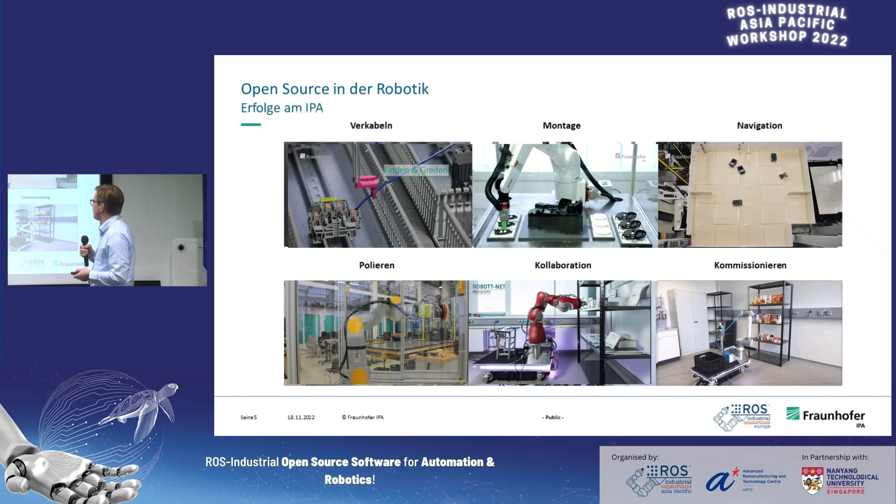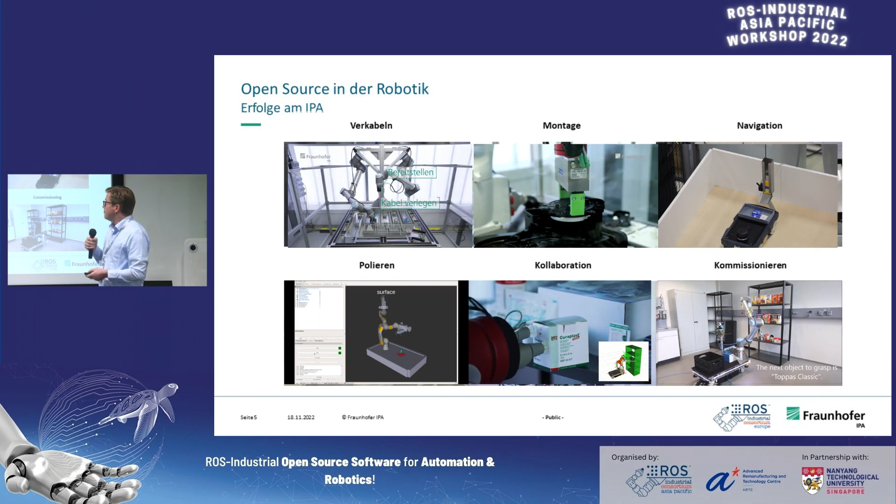All these applications that you see here, hope they are running, are implemented based on ROS, and some of them are already in industry. For example, navigation went into a spin-off. Cabling has been developed with a big cabling company from Germany as well. The assembly guys are also planning to spin off at some point.

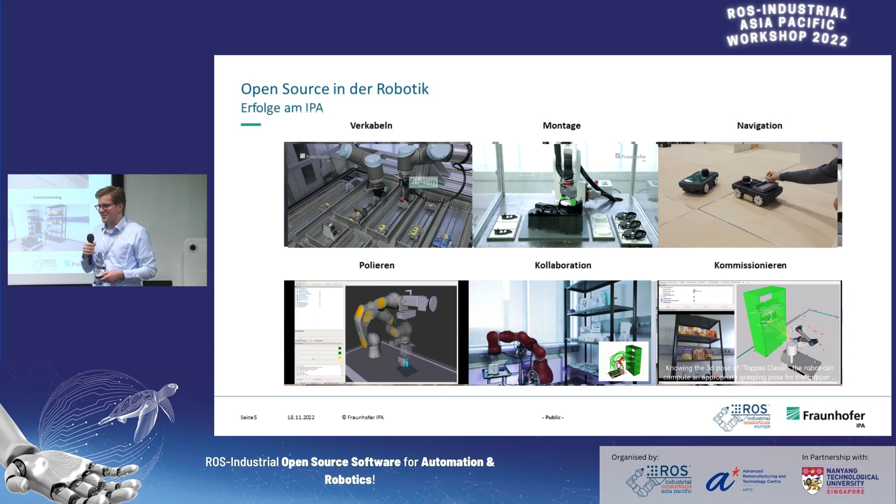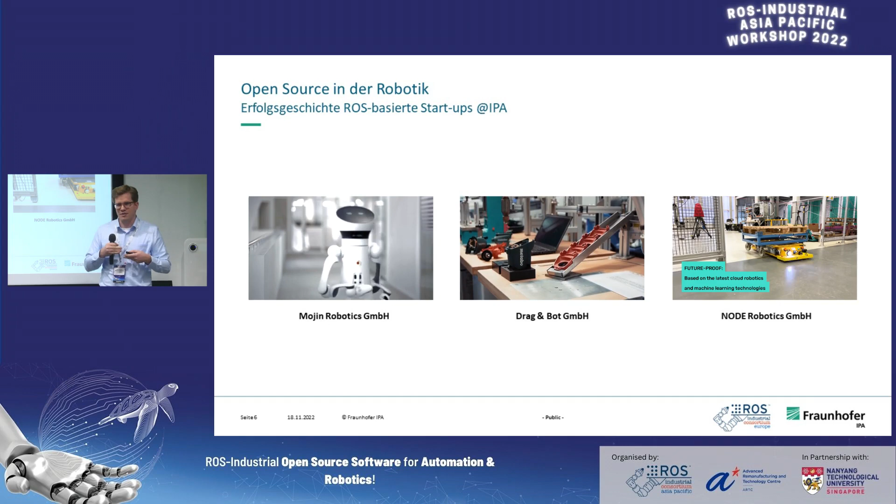A lot of things going on here, a lot of things also in cooperation with our partners at Southwest Research Institute, about publishing for example. We've also been very successful with ROS and bringing ROS into industry. For example, our department of roughly 70 researchers, in the last 5 years had 3 spin-offs, which is basically a record in the Fraunhofer organization.

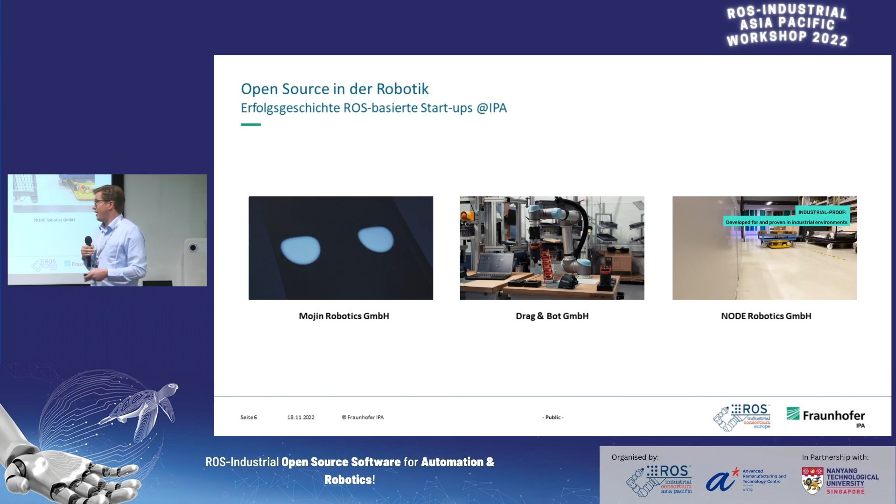And all of these are actually based on ROS. You see Mojin Robotics, which hopefully is running as well—the last one is not running, sorry. You see Mojin Robotics, which is the spin-off with Care-O-bot.

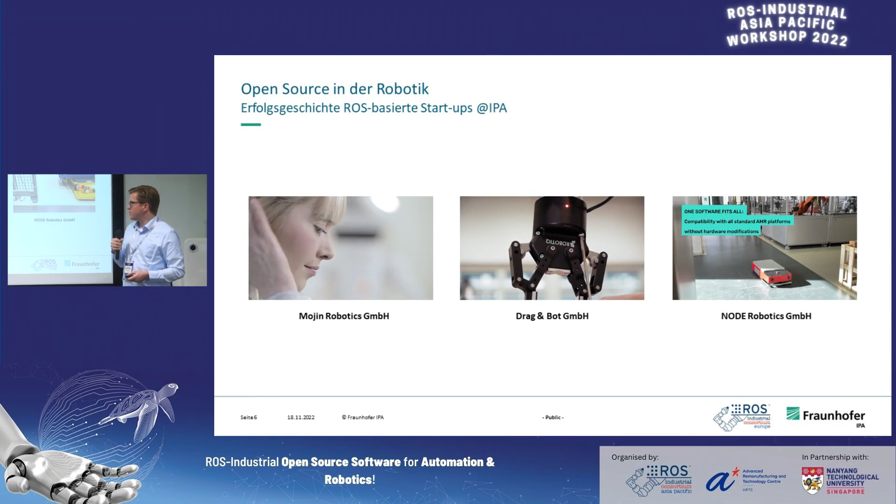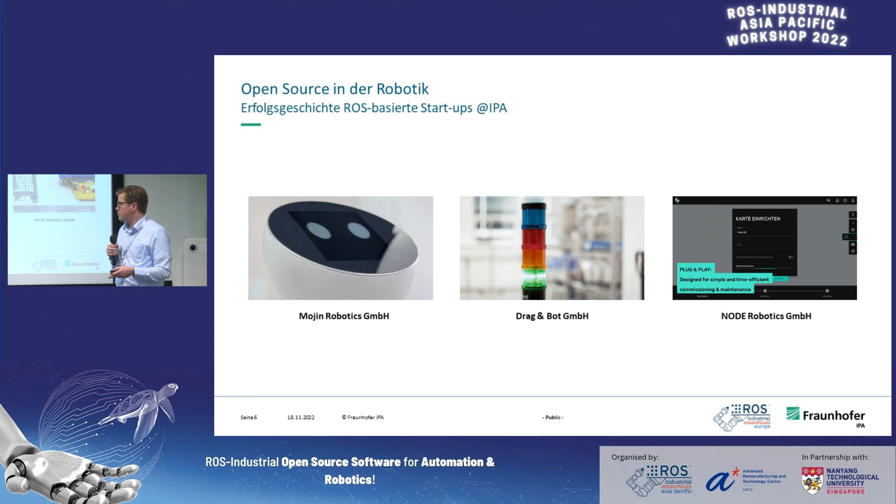You see, for example, Drag & Bot, which focuses on easy programming, all based on ROS. So these are all based on ROS-I. Mojin Robotics has been bought by Skio Automation, which is a big automation company, system integrator in Germany.

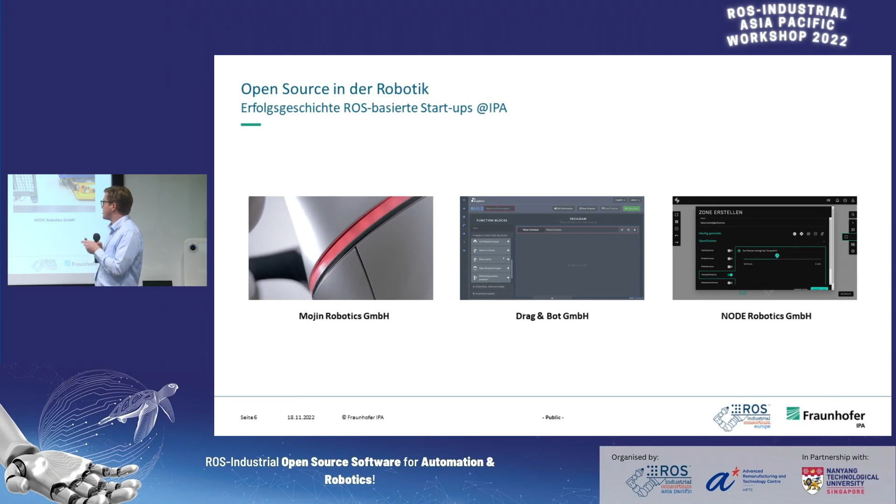Drag & Bot has been bought by Keba AG. And Node Robotics is our new spin-off—I think they left last year, or in the beginning of this year, when all the employees that went over in that spin-off left. Basically, they focus on navigation. They provide right now, I think, 300 or 400 AGVs, plus their software, in BMW plants. So also a pretty successful spin-off using ROS.

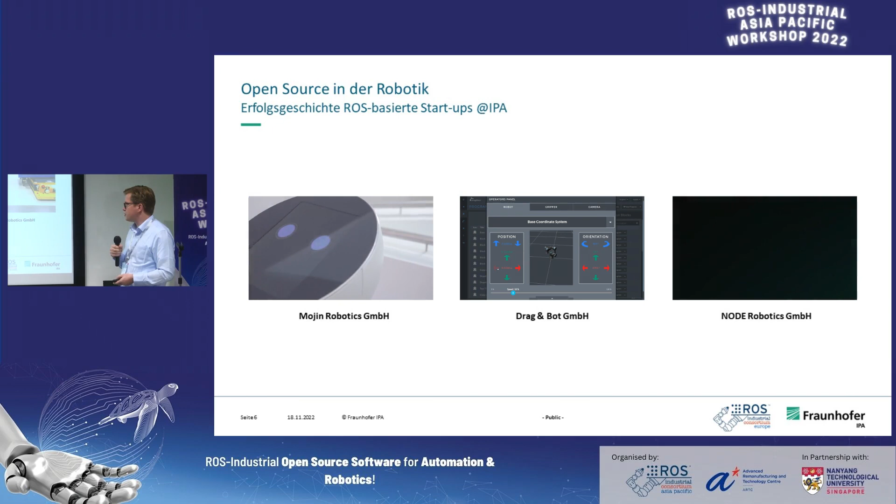Then the next question for us is, okay, what do we want to do in the future with ROS? For us as an institute, it's very important to look into what are the big trends, what do we need to solve in the future. I think that's what every roboticist should be aware of: what do we need to solve in the future?

For us, one thing is the warehousing industry. We all know that the workers in logistics centers, at least in Germany, are getting older and need more support, and that's where robotics can help. Similarly, in manufacturing, there's been a study from the IFR that shows that using robots in manufacturing correlates with employment and prosperity.

Similarly, we see in Germany at least, we have pretty big housing goals. So there needs to be a lot of construction to build those houses, but the problem is we don't have the workers. So the solution there is we need more automation in construction, and that could be achieved with robotics.

Healthcare, I think that's a huge problem in most countries. Germany is not better there, so basically we have a huge lack of skilled workers. So there we also need to see if we can support that somehow with robotics.

And then the third thing is in Europe we are looking into agriculture and trying to make agriculture more sustainable, using less chemical weed control products. So that's also one thing that robotics could solve: mechanical weed control in the end.

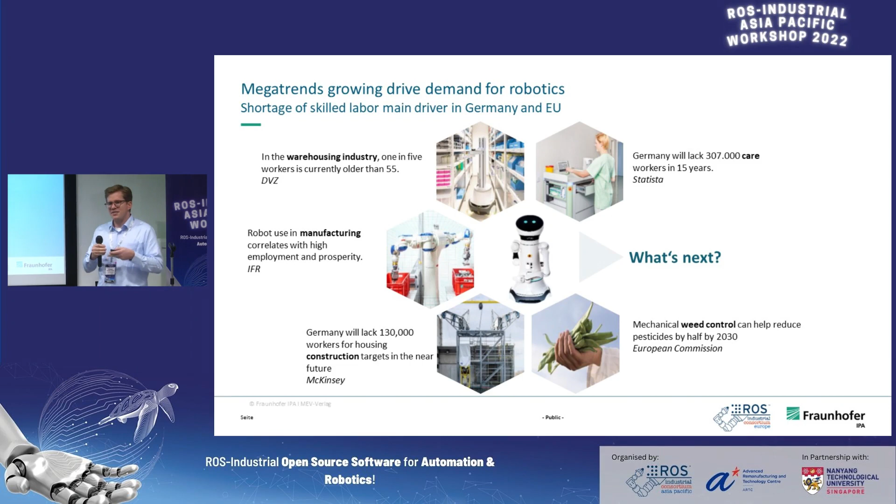So that's basically the challenges that we're seeing in front of IPA and that we're currently working on solving in the future. And now I want to show you that ROS-II is now at a point where we can use it to solve such challenges.

The one big thing that we had before, or even last year, is that the hardware interfaces in ROS-II weren't really that present. So we didn't have a lot of opportunities to really connect with hardware, which is one of the major things that you need to do if you build robots. You need the hardware. So I want to give you some highlights of new drivers and hardware interfaces that have been developed in the last years.

The first of them is the universal robots driver for ROS-II. I think that's one of the big success stories that we have within the ROSIN project. The ROSIN project was a European-funded research project where we funded a lot of small projects, and one of them was the ROS-I driver for the universal robot that was funded under this. The nice thing is that UR picked up this development and they are now supporting it as a company. They've even built the ROS-II driver, which at this point is the most developed one on the market. So check it out.

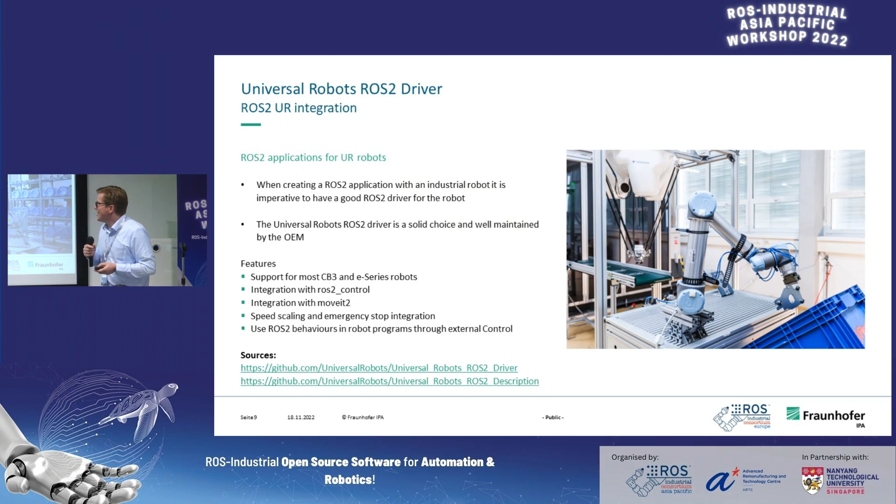Similarly, in the ROSIN project, we also got the ABB company involved in building the ROS-I driver for their robot, plus interfacing libraries, which are now used in a driver developed by PickNik Robotics for ROS-II. So also a great success story, I would say.

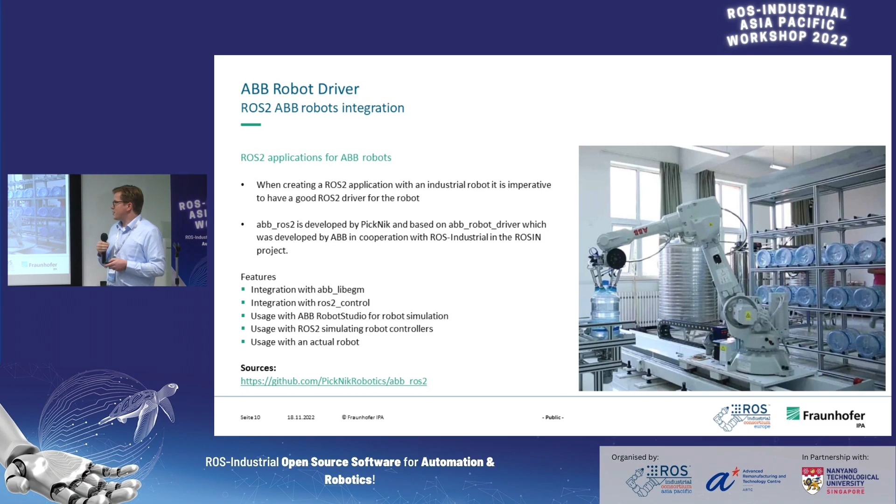The third thing I wanted to show is development we've been doing with a company called Phoenix Contact that produces PLC devices, as well as a lot of connectors. That's basically the part one knows about that kind of company. But they also have a line of pretty advanced PLC devices, a series called PLCnext, which enables pretty cool stuff like running Docker containers directly on your PLC next to the IEC 61131 environment.

So that's pretty cool, and essentially we got to working with them and building a bridge between ROS-II and their PLC devices, and it's now ready for early bird testing. If you're interested in using such a thing, just contact our friend and colleague Öztürk at Phoenix Contact. You have the contact details there. Write him a short mail that you want to test it, and he'll get into contact with you.

Basically, I think this opens quite some new possibilities in interfacing with hardware, and especially with automation hardware.

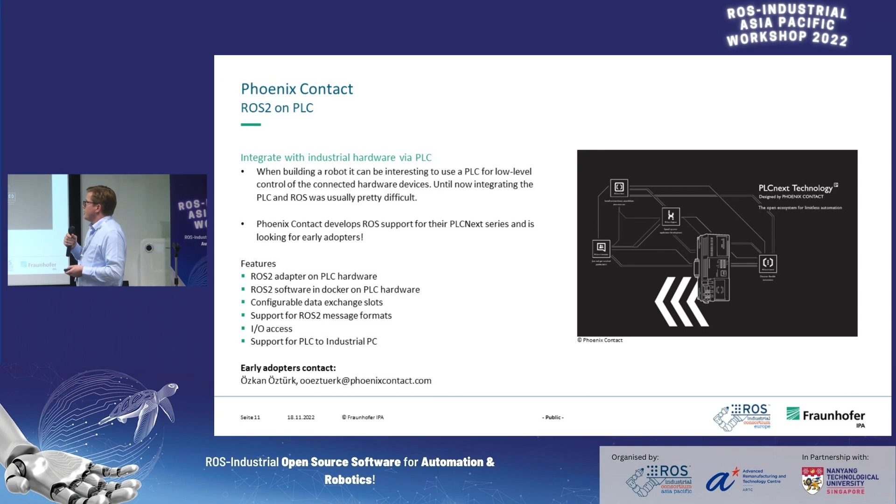And then the fourth thing I wanted to show is that we are also working on porting industrial bus systems. The first thing we started porting is the CANopen stack to ROS-II as ROS-Industrial. Pretty important, I think, for many mobile robots, but it can also be used in industrial applications, because that's one of the bus systems we usually use in mobile robots to connect with motion controllers.

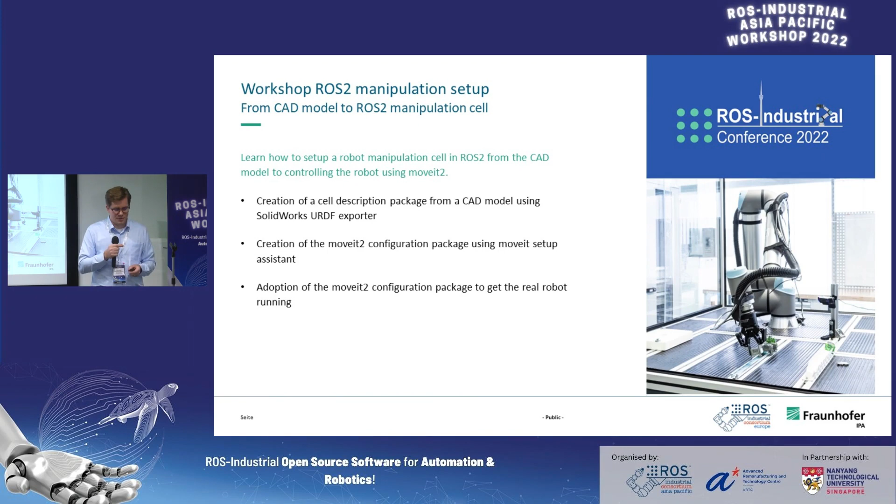The last thing I wanted to point out is that we had a little bit of luck, and we have a new European research project that we're going to be working on in the next few years, based on ROS, looking into machines that understand—basically cognitive machines. In that project, we're going to try to bring together model-driven system composition and machine learning algorithms. We're going to have 3 use cases.

On one side, social robots, robots that directly interact with people, talk with people, and so on—pretty interesting. Then we have inspection drones, for use cases like the oil industry and similar inspection tasks where you have big infrastructure that needs inspecting. And finally, manufacturing robots that work in production and need to understand what they are actually doing. So that's great, and I hope we're going to see a lot of nice results. All of them are going to be open source, because the European Union is also now pushing that all research results be open source, so that's pretty nice.

Yeah, and that's all. So if you have questions, just ask me, and hope to talk to you later.